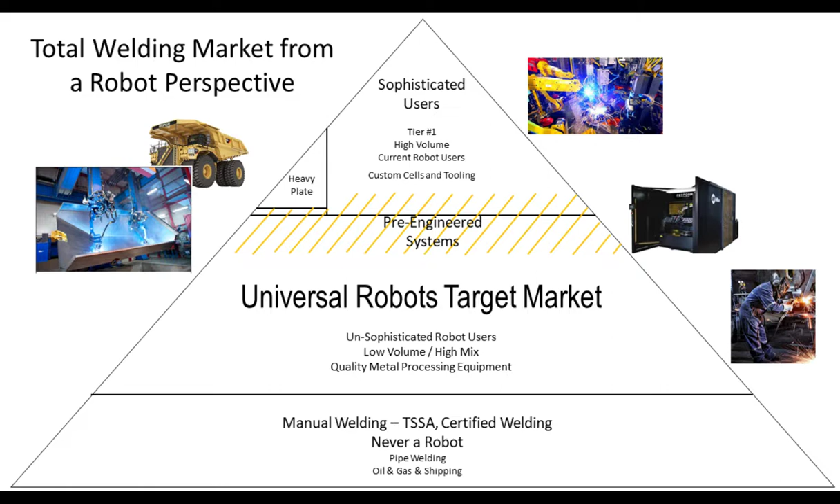So the robot companies will develop their strategies around winning, for instance, tier 1 business. For the same amount of people and resource output, they can sell a lot more robots. Obviously, margins are low, but they make their margins up in other areas. And so a lot of the technology that they developed, the robot development, is all based upon this kind of strategy. And so that has created, if you will, barriers; certain things that have been successful for those users have also become barriers to the target market and the low volume, high mix type applications. So let's go on into the next slide.

So let's talk about that traditional automation. What does it mean when these companies have developed their sales strategies and their products around going after these higher volume type opportunities? Well, what it has meant is, to try and capture a little bit of that low volume or high mix type job shop, and there's some pictures that are going to come up here in a video, they've done these pre-engineered systems. And in developing these pre-engineered systems, though, they still have a limited work envelope. And it still very much is the fact that the production will revolve around the automation. And we're going to discuss this a little bit more in the future here.

But the big thing for both the tier 1s, the heavy plate, large part manufacturers, and the job shop type shops that are buying the pre-engineered systems is they have to justify the purchase of it through calculating utilization. And so what that will basically mean is if you have a high volume number of parts per hour, then right away the salesperson is going to ask you how many parts do you need to make, what's your cycle time on those parts? And what they're really looking for is, what is your utilization ratio going to be for your robot? Are you going to be using it 10% of the time, 20% of the time, or do you have a 2-shift operation? And once they see that utilization based upon the volume of parts go up high enough, then they realize that you're a customer that could utilize automation.

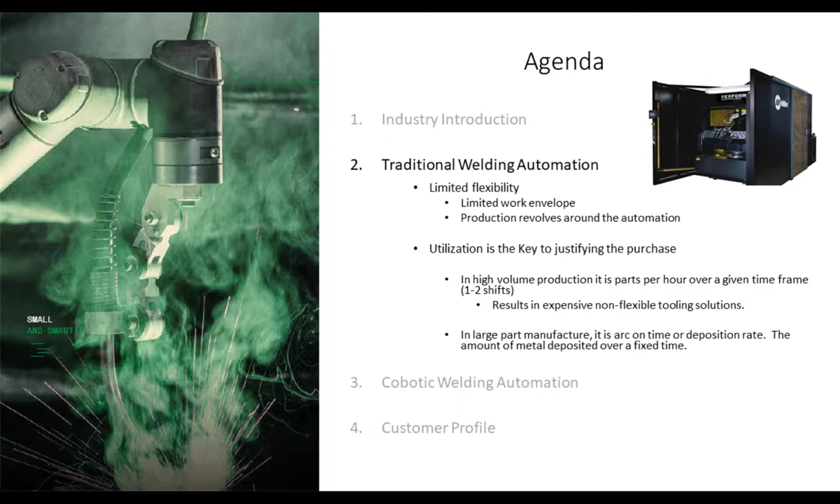That's how they will justify it based upon the utilization. So what we're going to do here is we're going to watch a video in which this gentleman, who's the COO of the company, is going to be discussing a cell that they have purchased, a pre-engineered cell, and then discussing a cobotic welding offering and contrasting the difference between the two and what his business model needs to look like based upon whether he's buying one of these pre-engineered traditional welding systems or buying this flexible cobotic welding system.

And then we'll go through a little bit more diving into the traditional welding automation. So you can start the video now.

All right, I'm standing here with Eric Larson, right? That's right. Eric Larson from TMI. What's your title? Vice President of Operations. Vice President of Operations. All right. So I'm just picking Eric's brain here a little bit. So we're going to put this on video now and walk over.

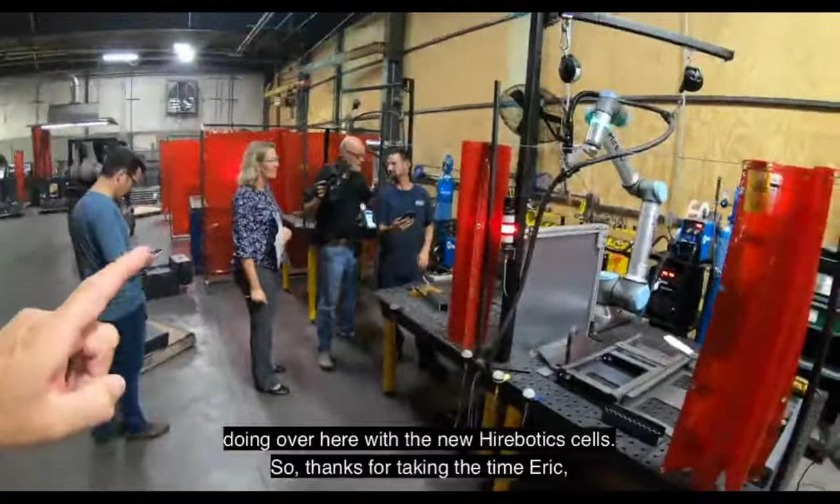But we're going to contrast a little bit about, they have a semi-flexible cell called a pre-engineered system over here we're going to talk about, and contrast that against what we're doing over here with the new Hirebotics cells. So thanks for taking the time, Eric. I really appreciate it. You're welcome. So why don't we walk over to the fixturing cell and we'll discuss a little bit about what you did there.

All right, Eric. So talk to me a little bit about this cell and your experience here with it. We put this cell in a number of years ago for 2 product lines that we were doing that were very large run product lines. So on this robot, there's 4 stations, so we could run four parts on here and never stop the welding process. But we found it was only good on a large run product.

And most of our products now are short run, small run, 50, 100, maybe up to 5,000 parts a year, but that only equates to a few hundred a month. So we don't use this. It sat vacant for a couple of years, and then we got a company that came to us and wanted us to do a part, which was a high volume part. They had a lot of parts to go into the part.

So we had a fixture made, which was very expensive, $25,000 for a fixture, to ensure that all the components of the parts are in the proper space and all the welds get put in the right spot. But right now, that's the only large, high volume part that we do. So, on the definition of high volume, how often do you run this cell per week? Right now, they've slowed down because of the time of year, but when we get into the spring we'll get up to running two shifts a week, so 80 hours. Okay, so 2 shifts every day per week on this cell.

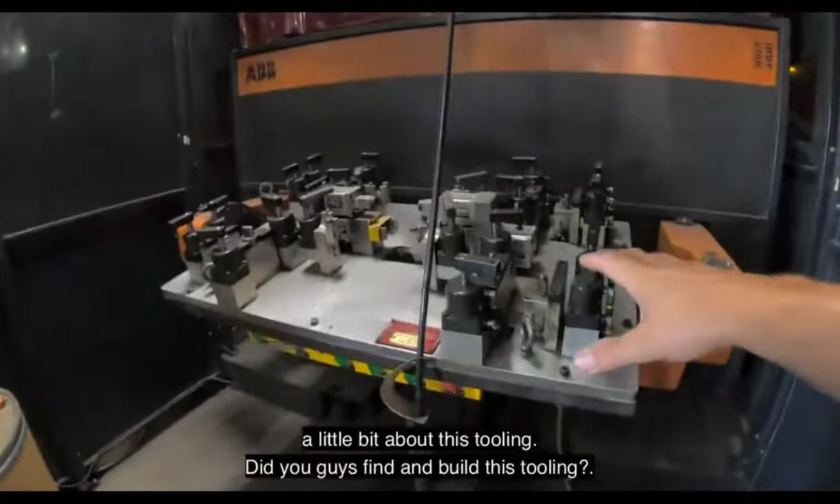Yep. And so let's talk a little bit about this tooling. Did you guys buy and build this tooling? We had somebody design and build the tooling, and it's owned by the customer who we do parts for. Okay. So you don't own the tooling, the customer owns the tooling. Is there a particular reason for that? Because of the expense. We would have had to add the cost of the fixturing to their part. And instead of doing that, they said they'd buy the fixture, so then if they wanted to pull the fixture back, they could have the fixture. And we didn't have the extra capital invested in it.

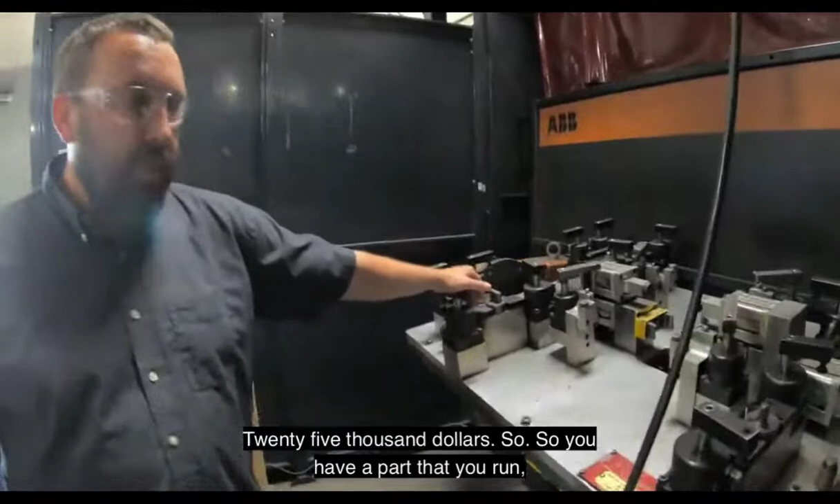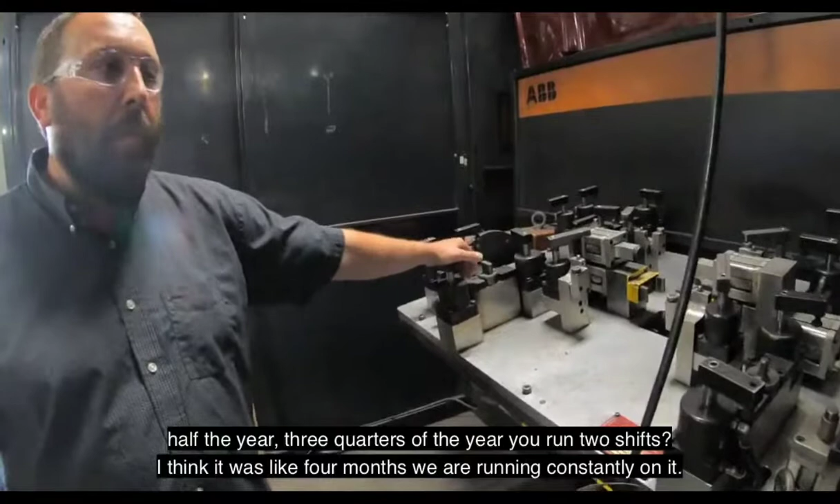Right. Makes sense. So roughly, what would the price of a fixture like this be? This one was $25,000. $25,000. So you have a part that you run; at a certain time of the year this cell isn't running, maybe once a week, but at peak times, how much of a year would that be? Like half the year, 3/4 of the year you would run 2 shifts? I think it was like 4 months we were running constantly on it. Okay, so 4 months out of the year you run constantly, the rest of the year you're maybe running 1 shift a week or something like that to make up the parts. Okay.

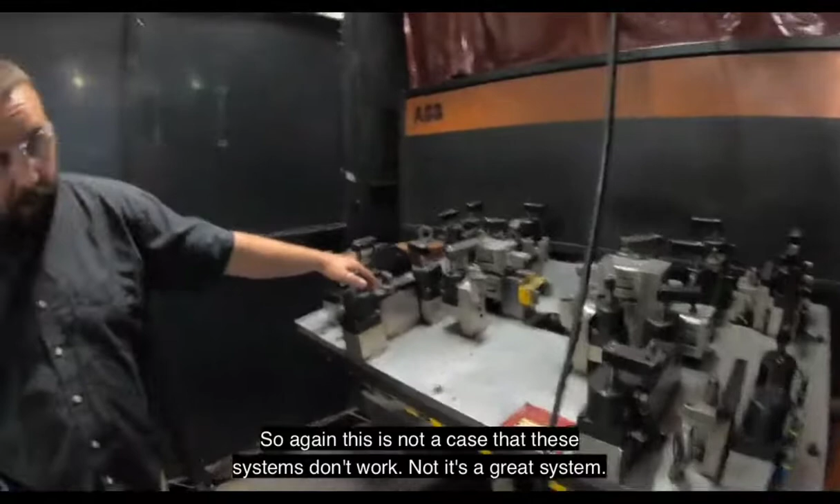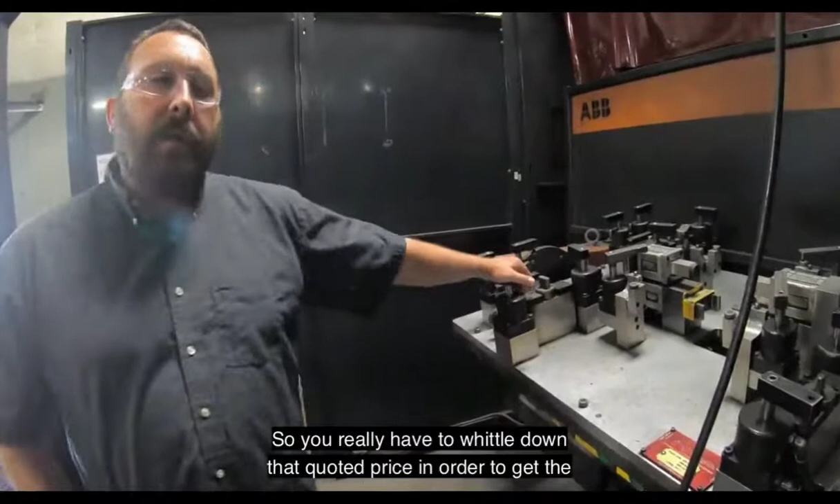$25,000 tooling. So again, this is not a case that these systems don't work. No, it's a great system, but you got to have long run parts. Got to have long run parts. You can't afford to build fixturing for short run parts. It's just not cost effective. When you're doing short run small parts, you're talking pennies, dollars compared to another customer. So you really have to whittle down that quote price in order to get the part in the door, and that doesn't usually include a fixture for it.

Right. Okay. So contrast that then to what you guys are seeing, some of the benefits and capabilities of the cobot-based welding system that you have over there. On the new robots over there, the table is the fixture. Do you mind if we walk over and we can talk while we're...

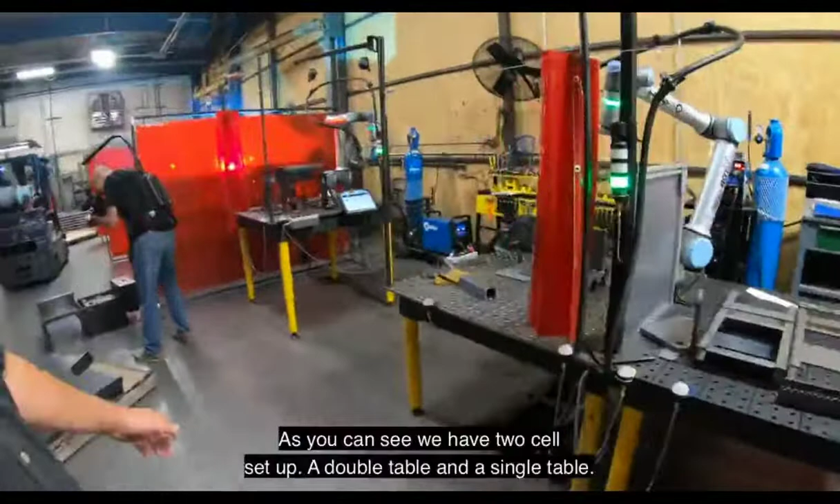As you can see, we have two cells set up, a double table and a single table. The double table acts more like the cell we were in, where you can be welding a part while setting the part up. This is the second robot we got in. We asked Robotics to do this for us so we could do a double cell on it. That way it's always welding when the operator's putting another part on the bed.

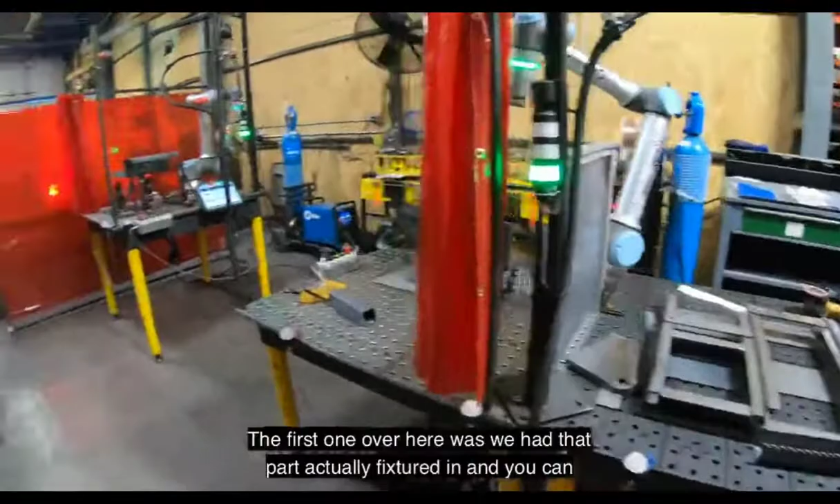The first one over here, where we have the part actually fixtured in, you can see the fixture. So it comes with all the clamping. So you can take your part and you can figure out how to set your part up where we use the clamps to hold your part in place. It's all based on pin locations of holes. So after we get a part located like this, we'll take a picture of it and we'll document the hole locations and what clamps we use.

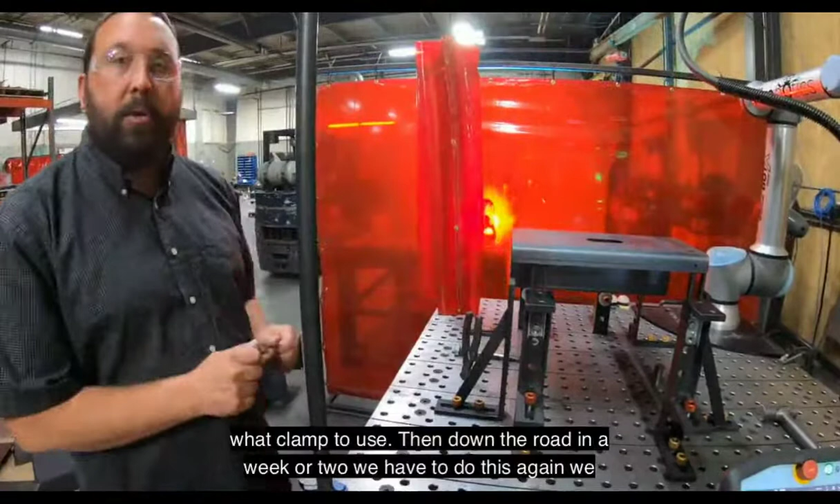So then down the road in a week or two, when we have to do this part again, we go back to the picture, we go back to the setup sheet, and we can set up the exact same way. So the program that's in there will weld it the exact same way.

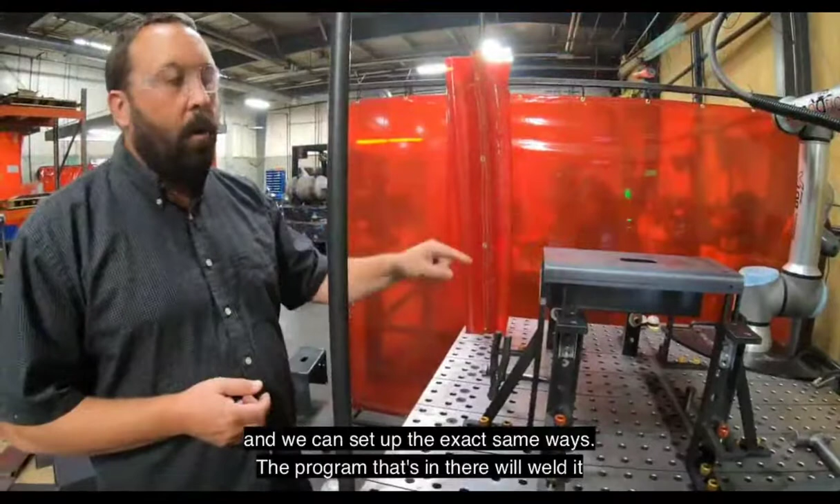All right. Sounds good. Thank you for the time, Eric. It's a pleasure. So this is, again, this is Fixturing here at PMI. They are shooting a case study video here, but I'm taking all these little clips, so I really appreciate the time, Eric. You're welcome. All right.

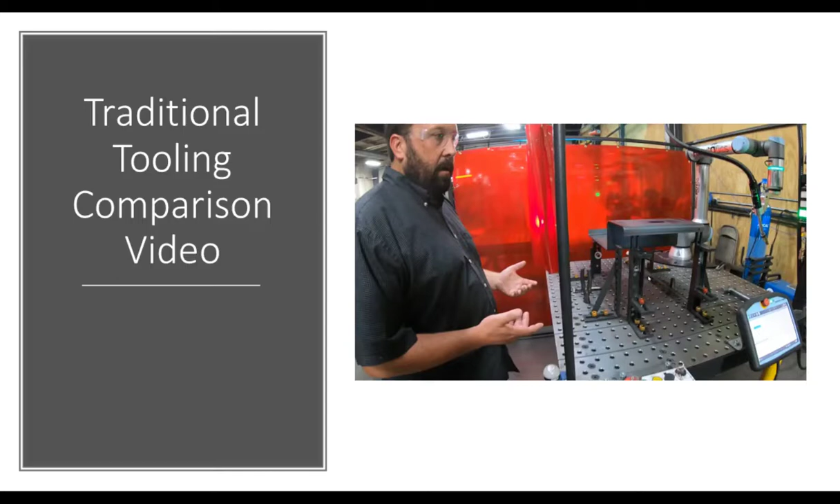All right. Thank you for watching that. A couple of things I'd like you to pull out of that video. Number one is the inflexibility of the tooling on the traditional automation system. And number two, the cost of the tooling on the traditional automation system. And there we go. So, I want to contrast that a little bit as we go through the traditional automation. We're going to talk about high volume type production right now, and then contrast that with what you would have seen there with the cobotic systems and the flexible type tooling.

So in traditional welding automation, cycle time is the key. This translates into fastest robot wins. I've been involved in head-to-head competitions where the decision on which robot they'll go into comes down to 0.1 of a second. Simple math will show you when you're doing 500,000 of a part that has a 30-second cycle time, if you can save them 0.1 second either on every weld or every part, that translates into hundreds to thousands of parts extra that they produce at the end of every year. So cycle time really is the key in high volume production.

And so because of that, the robots are caged. They have to be installed in an environment where they are locked out from operators or anybody. Even area scanners can't be used, because if people walk up to the area scanner and it causes the robot to slow down, that affects their cycle time. And they have these parts down to the fraction of a penny in terms of profitability. They need to manage all of those things. So the robots are locked out. No human is allowed to interact with them. This guarantees a specific rate of production and enables the robots to move at their maximum speeds.

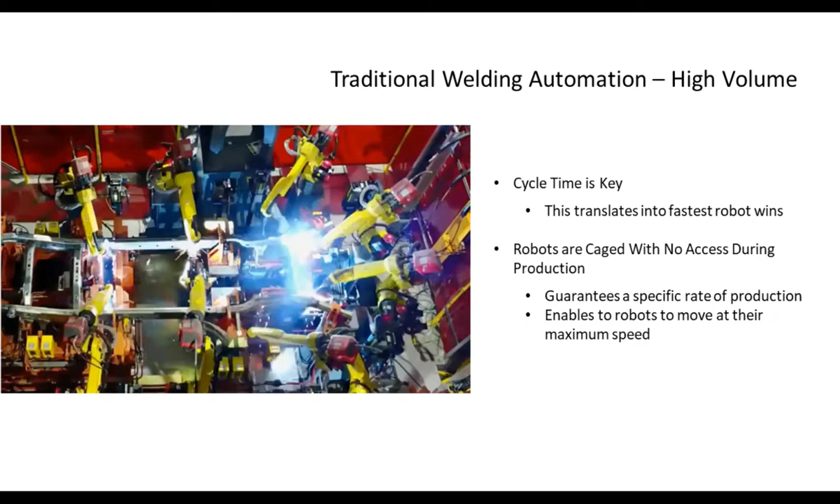One of the things you can see here, and I'm using this truck frame as an example because this is the extreme example of high volume type production with a lot of welding on it. And one of the things that you can see on this is that there's a lot of components that go into this final assembly, as they call it, this final frame. And many of these components, there's more than one. There might be two, a right hand and a left hand, or they need 2 or 3 cross members to go in. So they'll have a final assembly fixture where they put all this together and weld it together.

But they also need sub-assemblies to put this together. And these sub-assemblies also need manufacturing cells. So the slide before this one showed one station in a whole line that would be put together to manufacture the final frame. But outside of that manufacturing line, they will need sub-assembly cells to make the subcomponents that go on to that final product. Now, why is this important? It's important because it's not just the cost of automating that final frame. It's the cost of automating all the sub-assemblies that need the same level of accuracy and quality coming out of it.

And so a lot of companies will not have the volume or will not have the profit margin in the product that they're selling to their end customer to be able to automate both the sub-assemblies and the final assemblies to put together a final product for the customer. And so they still are forced to do it manually, even though the equipment they have processing the parts that need to get welded together creates parts of a high enough quality that they could automate.

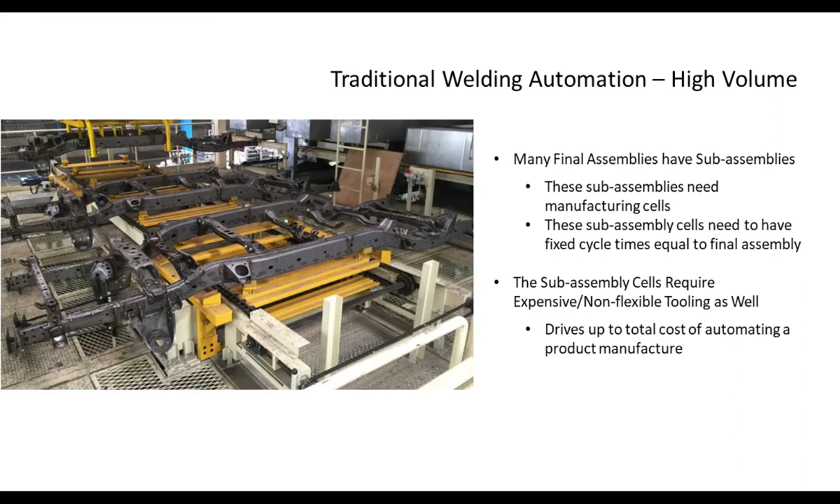Then you get into large part manufacturing, and large part manufacturing is actually justified the same way to automate, which is through utilization, but a slightly different calculation. What we've talked about up until this time is volume of parts. This will be on deposition rate, arc on time, how many pounds of wire the robot is able to place on the part in a given period of time.

And it requires also a lot of other technologies to go into it. A lot of times these parts are not as accurate, as an example, as the high volume type parts. And so they need added technologies to the robot, such as through arc seam tracking, TAST, touch sensing, or laser seam finding or tracking as technologies added to the robot to ensure that they're able to complete a quality part.

And this gets into the other major point and the major reason that many manufacturers are looking at and interested in even the cobotic solution and are still trying to implement traditional welding automation, though unsuccessfully, in certain manufacturers. And that is because they can't find people. If you were going to weld these large parts by hand, you would need highly qualified and skilled welders. They can't find them.

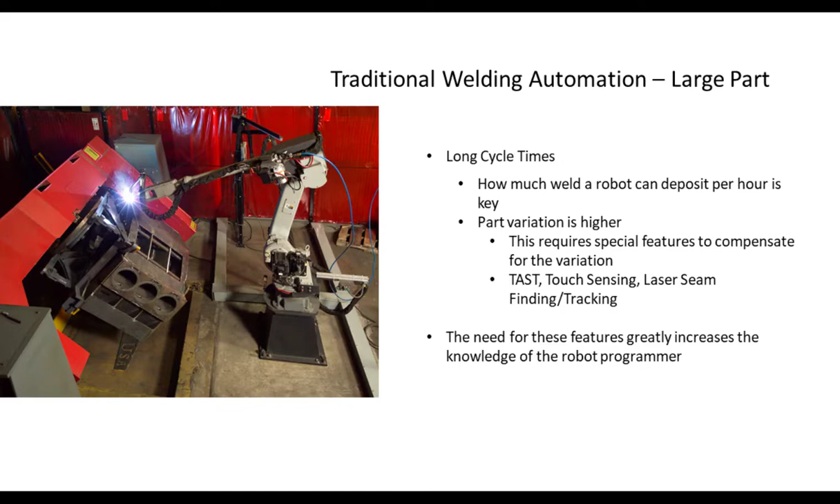Then you can get into situations where you might have two robots working on the same part, and then you have part manipulation. The part has to be turned, and so you get into things like coordinated motion. And all this speaks to, you need very, very knowledgeable operators and robot programmers to be able to keep systems like this running.

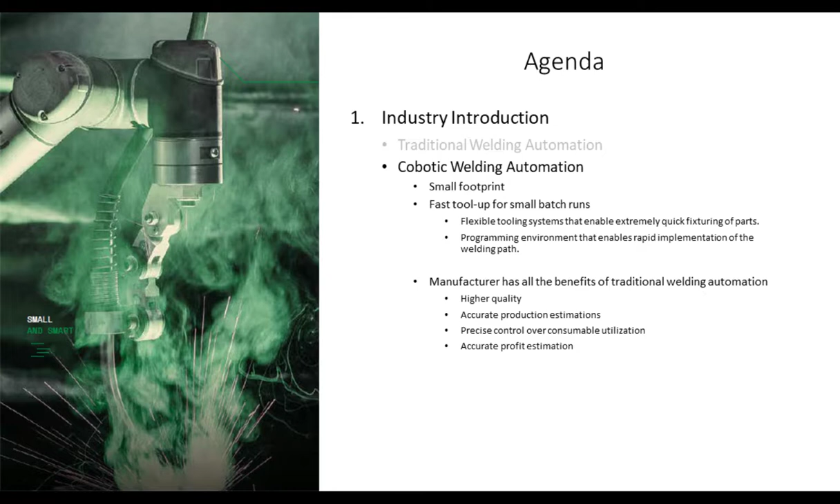So they have to be very accurate. Even small job shops still have to be very accurate when they go out and they quote business to win it. And this now affords them the ability to be accurate. They don't have the variability that exists in manual welding. And so that precise control over consumable utilization is very important to that. And so they can get accurate profit estimations for their business.

So what we're going to look at now is a system overview video. This is the gentleman on the floor who runs the systems, talking about the benefits of the system, and you will see him address the 2 things that I've talked about: the speed at which he can fixture the parts, and how quickly it took him to learn how to program the part. So you can start that video now.

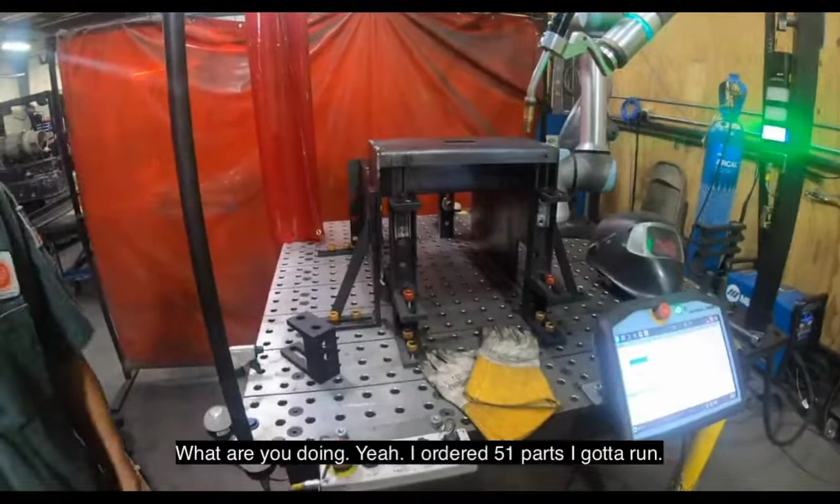All right, I'm here with Sean from PMI. Sean, you're running some parts here. What are you doing? Yeah, I got an order of 51 parts I got to run. I've set it up pretty easily with the tooling that was provided. It was pretty quick to set up. I'm ready to rock out with 51 parts. Okay, so these are your 51 parts that you're running today, right? Yep. Use all the side components to the part. My other pallet's sitting across the shop. All right, so low batch production, you got an order for 51 parts.

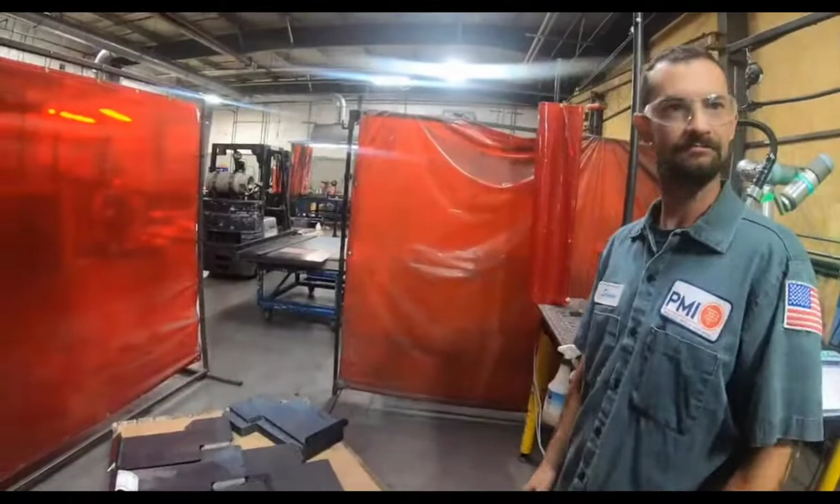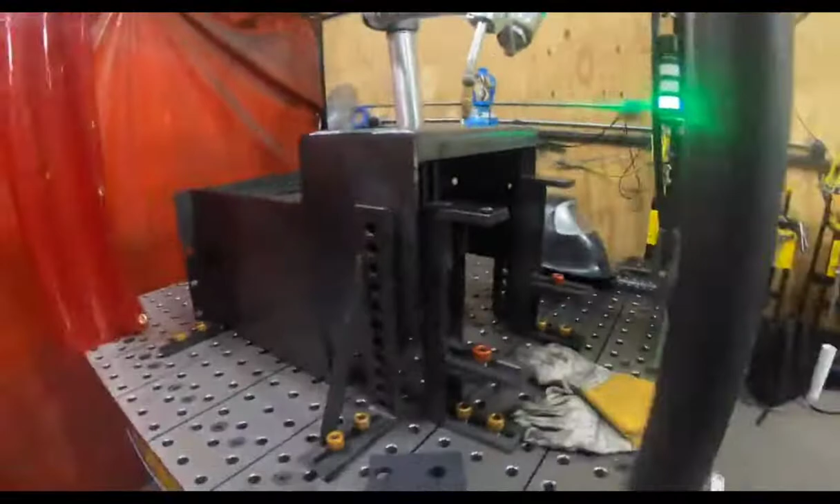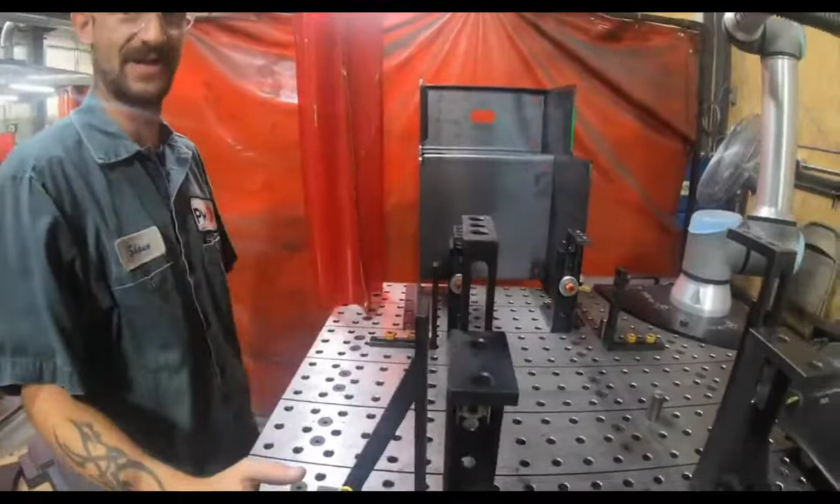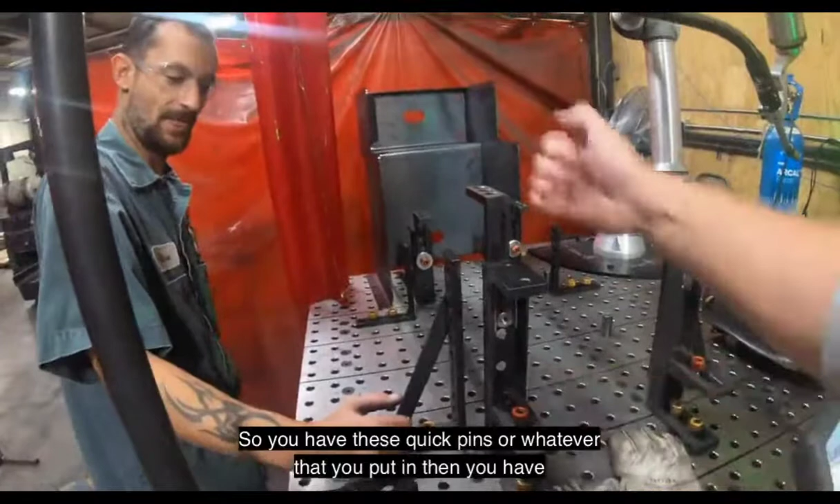So tell me a little bit about the tooling here. What is this tooling that you're using here on the plate, and how does this work? The tooling here, it's kind of like playing with Legos or... The K'NEX? You know the K'NEX stuff? Yeah, that's exactly what I was trying to word. It's kind of like playing with K'NEX, this tooling is. It's kind of fun to jig things up. So you have these quick pins that you put in, then you have these angle brackets and everything that you arrange to fixture the part.

Yep. So you guys, in case you didn't see on any of the other videos, they have quite the fab shop in here. So they have CNC brakes and punch presses and everything else. They have high quality parts coming in, and they have modular tooling here that they can put together really fast. And so you can do small batch runs like 50 parts quickly.

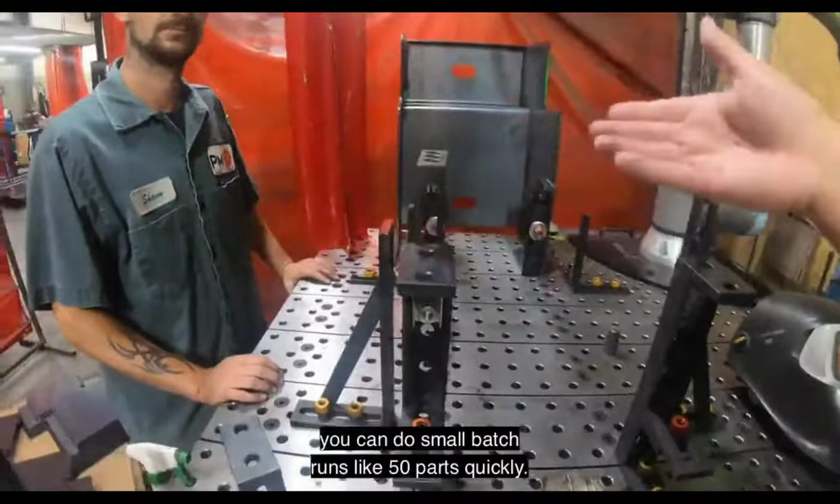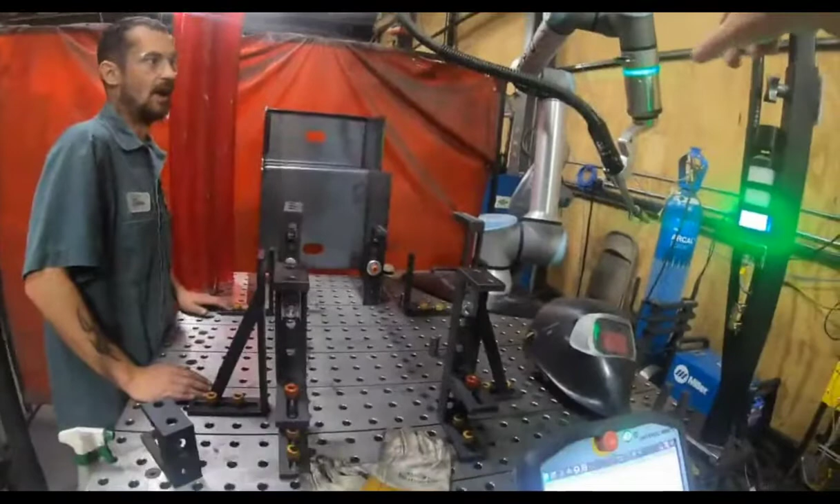So how much time would you estimate it takes to set up something like this? The whole setup, maybe an hour, and that's because I'm still new with the system. So it took you an hour to set up, and you can run 50 parts after that? Yep. How long did it take you to learn to program the robot system? When it first came in, about a half hour. What? Had you ever used it before? No. You never used the system before, and in a half hour you were able to program? Yep. It's fairly easy. It's user friendly.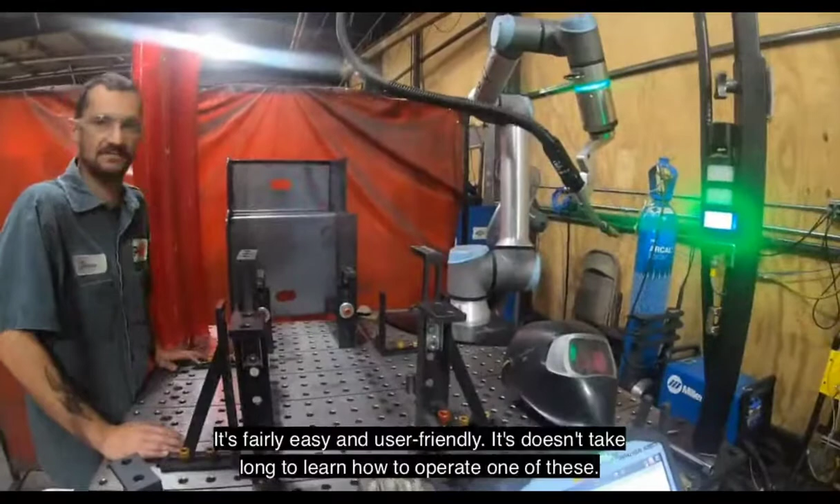Yeah, it does not take long to learn how to operate one of these. Well, Sean, thank you very much. Not a problem. That's awesome information.

So, yeah. So, again, Mitch, we're here. We're going to do a case study, but I noticed what these guys were doing, and I thought, you know, a little quick clip for you guys to kind of get an idea of what we're doing here with the collaborative robotic welding. See you guys later.

All right. Hopefully you enjoyed that video. A couple of things in there. You saw the tooling and what they're using there. And the other thing, to address the ease of programming, you watched him walk around the cell, take the robot, he pressed the button, and he just moved the robot out of the way so he could get the part out.

To contrast that, for anybody on this webcast that either hasn't programmed a robot or just doesn't have that teach pendant in your hand experience, even for an individual that has tons of years of experience on a teach pendant, they would have had to have picked up a robot teach pendant, figured out what movement system they were in, Cartesian, tool, world, figured out which way to push the button to physically move the robot out of the way.

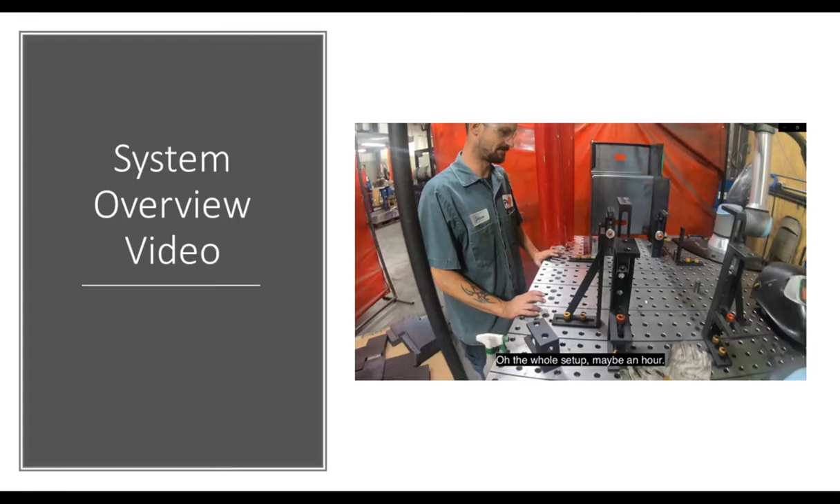That would have been, for the best of the best, a 30-second job. For most people, probably a minute and a half. Doesn't sound like a lot of time, but when you watched him do it, he did it in about 2 to 3 seconds. And that's the difference of the time factor. If you can program a robot in that methodology, you're gonna be able to create programs far faster than with the traditional programming method.

And so one of the things that you could see in both videos actually, and talked about quite a bit in the first video, was the flexible fixturing. One of the keys to this is you still have to have accurate and good fixturing. The robot's still going to go to the same place every time once you create the program, but you need to be able to fixture the part quickly.

And so with these flexible and modular tooling systems, you can greatly reduce the time to fixture the part from one to the other. The tooling is not dedicated to a specific part, but is modular and able to be conformed to your part. And what you heard Eric say in the first video was they take a picture so they know the layout of the holes, and if they ever have to do another 50-run batch of those parts, they'll know exactly where to put the various components of the fixture so they can just hit start and run that part again. So this modular tooling really makes a difference in terms of programming the part.

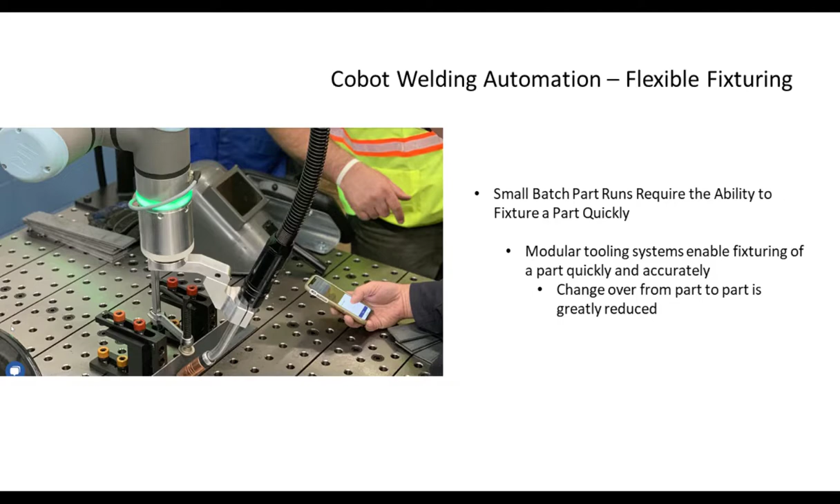The other thing I do want to say, because I think it is important for everybody to understand, is if you notice that I pointed down their fab shop, you still need quality parts coming in. If you're a manufacturer on this webcast and you have your 10-year-old son or daughter with a tape measure chopping bar stock off with a bandsaw, you're probably still going to have some struggles. But if you have quality processing equipment processing the parts that go into the final assembly or sub-assemblies, and you have quality modular fixturing and tooling, you can fixture up parts very, very quickly.

Fast programming. I talked about it a little bit when I talked about Sean pushing the button on the robot and moving it out of the way. But the ability to teach a program very quickly is the second important factor in ensuring success of cobotic welding or success of automating small batch, low volume production. And so from Sean's own mouth, I'd not asked him that question before, from the time he saw the robot for the first time to where he could create a program and make a part was 30 minutes.

And I want to also make clear with traditional automation, typically when you purchase that, you're usually negotiating, and most companies will throw in one seat of training.

What that means is that's about anywhere between a $1,500 and a $3,000 course. It usually lasts about a week that you would have to take your person off the shop floor, send them into that training class to get trained on just how to make a basic program with the robot. And then typically there's secondary training classes that they'll have to go to, again, ranging from $1,500 to $3,000 to learn to use all the special software that you will load on your robot.

As an example, you'll need extra training specific to welding, the welding software. You'll need extra training specific to if you have touch sensing, through-arc seam tracking, laser tracking. Any of those software features require extra training and knowledge. So not only do you have to take your individual who's being trained off your floor and they're not being productive on your floor, they're now getting trained and you're educating them. Hopefully they're dedicated and stay at your company. In a lot of cases, they end up finding out that they're now marketable on the street, and companies complain about turnover of employees. And so all of these things come into play.

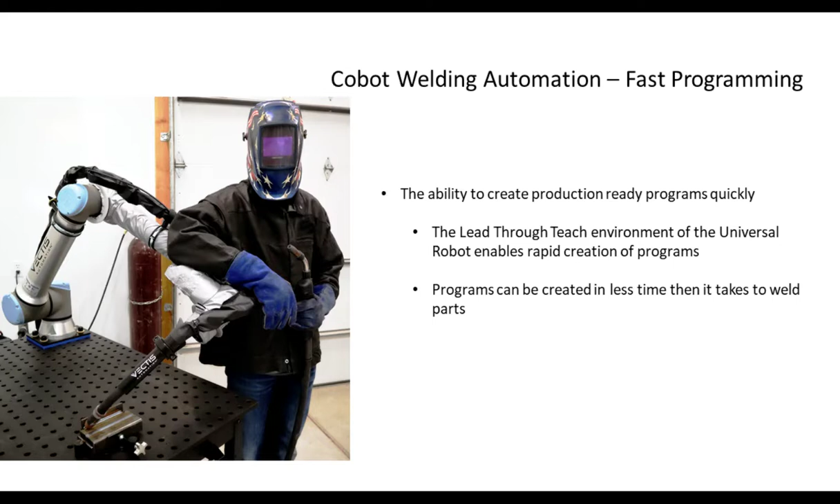And now the company is able to go out and bid on and win more business, making that company more secure for the future and all the other employees working there. And now those companies who traditionally haven't qualified for welding automation now can automate. They get all the benefits that all the companies that have automated in the past enjoy.

And so high volume manufacturers, people have said to me, I disagree with it, but they don't make cars like they used to. Well, no, they don't make cars like they used to. I'm kind of happy that they don't make them like they used to. They're far more reliable and of far higher quality than they ever were in the past. And a lot of that comes from automating the manufacturing processes of building automobiles. And so tolerances are much tighter and quality is much higher.

And so this particular company in these videos that you watched makes parts for fire trucks. So typically, fire trucks aren't going to be super high volume, but I would think that we would all want high quality fire trucks so that when they pull up to put the fire out in your house, it actually works and doesn't break down on them. And so enabling these companies to enjoy the same levels of quality that these high volume manufacturers, giants like Caterpillar and New Holland that have a lot of welding, get to enjoy, and pushing that down lower into manufacturers that maybe are doing smaller volume, makes higher quality products available to all of us.

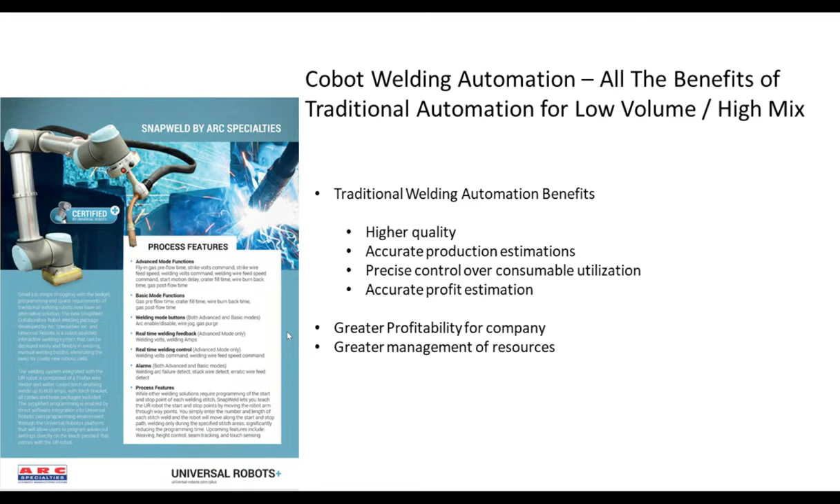So let's look at what a typical customer profile would be. If you haven't guessed yet, low to medium volume part production. There's a lot of companies that fit that category, far more of those actually than in the high volume production. Companies that need high flexibility in production, take the automation to where the production is being done.

So as I alluded to earlier, companies that buy these traditional automation cells, like the one in that video, plunk it down in a certain part of the shop. And yes, I know the robot manufacturers and welder manufacturers that sell these pre-engineered systems will say, well, you can pick it up with a forklift and move it around your shop. Nobody does that, just in case you're wondering. They put it somewhere, wire their three-phase power there, put their shielding gas on it, add their wire and start welding, and that's generally where it'll stay. Not saying nobody's ever moved them, but it doesn't typically happen that often.

However, with a cobot that you can pick up by hand and move, you can actually bring the automation to where the production is being done, potentially. And if the nature of your manufacturing doesn't allow you to reorient your manufacturing around an automated cell, what you want to do is insert automation into your current way of doing production. This is the best way to do it.

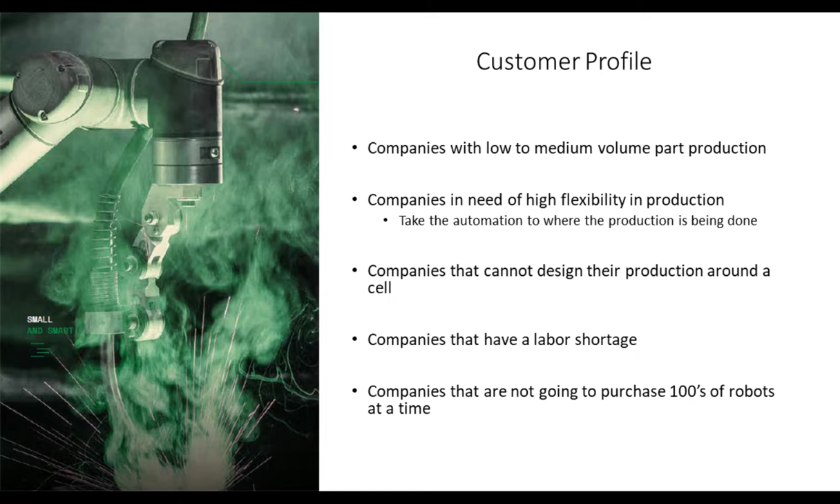The title of this presentation was "Collaborative Robots Are Now Skilled Welders. What's Next?" So if I can get on a little soapbox for a second, we all like to talk about sending robots to Mars, opening up a capsule, and the next thing you know, we have robots mining minerals for us on Mars, and all of this kind of stuff. But at the end of the day, I think the vast majority of people out there want to know that their job is secure. They want to know that the work they're doing is contributing. And in my opinion, that's what's next.

There's nothing amazing about this outside of the fact that if you're in this industry like I have been and you've traveled around, you have seen so much manufacturing that can utilize a product like this. And through Espen's brilliant mind coming up with a UR collaborative robot, it has opened up a world that didn't exist before for a whole group of manufacturers. And that's what excites me.

What's next for me is seeing a revolution in manufacturing that is quite significantly different than what we have seen before. If I can put a plug in, come to FabTech 2019 if you want to get hands-on with some of these products and processes, because I think that we're going to see a radical change in manufacturing and what manufacturing floors look like into the future.